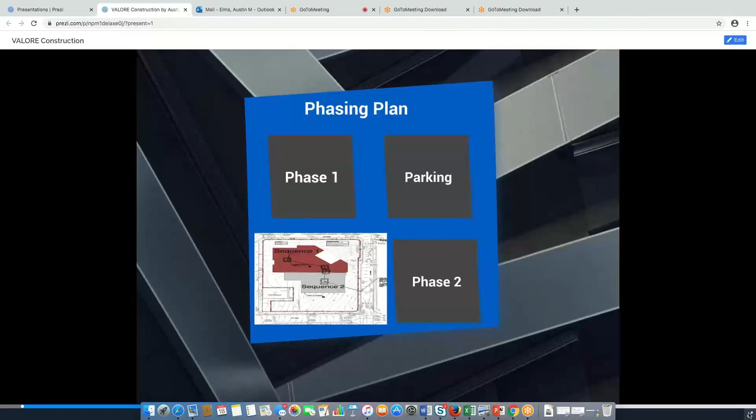So with that, we will move on to the project site logistics plan. We've put a lot of thought into this, with approximately 4 to 5 different entrances transitioning throughout the entire project. We have the construction office space in the lower left-hand corner, a double wide per spec.

We also have break areas under shade where we can have lunch or a safety stand down, whatever we need that space for. The long-term material laydown area on the south side of the site was designed to hold approximately 20-foot length connexes for each of our contractors to use if they need extra material.

Coming in from the right-hand side from construction gate C, we will have dumpster pickups coming over from that road, with the ability to pick up all 5 of those dumpsters for LEED regulations. As you can see, we have multiple long-term laydown areas.

For sequence 1 for building A, we've designed the short-term material laydown area where building B is, which we will use to house all of our steel that we're erecting for building A and any other miscellaneous items we'll be using for building A.

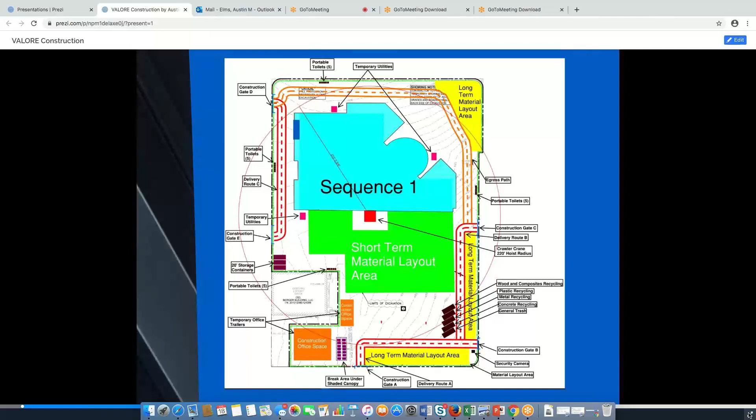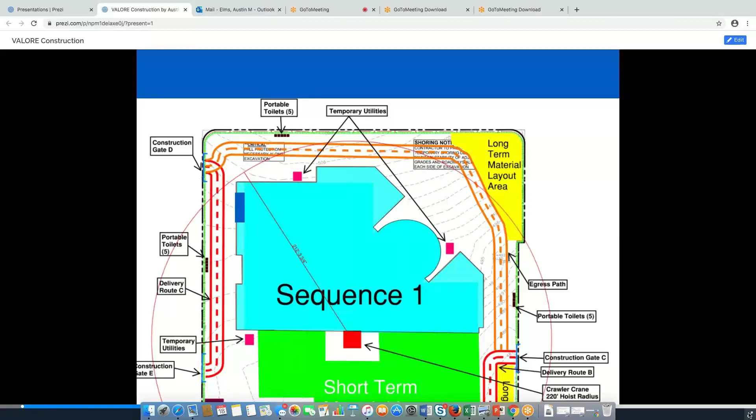Up on this side, you can see the darker blue area where we have our buck hoists. Material will come in from that, and if it comes in from the bottom right-hand side, they can use that egress path we designed at the very top to get material from the bottom to the top.

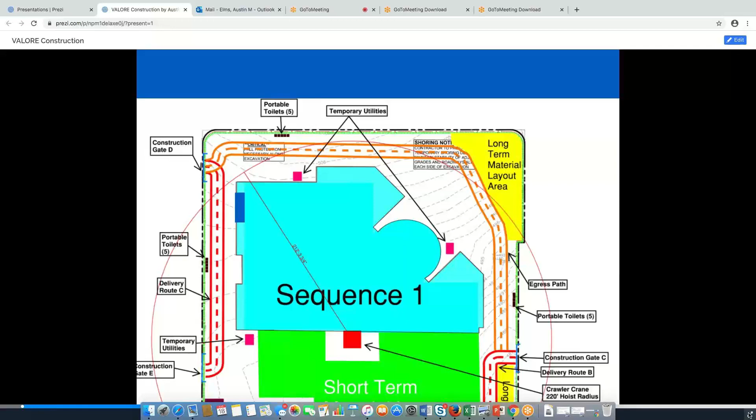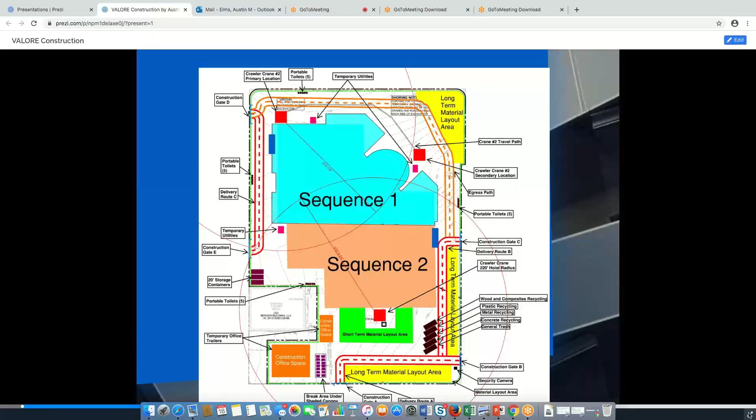Then we will move on to phase 2, where we'll be building Building B. The main difference that changes from this is we significantly shortened the amount of space we have for short-term material laydown areas. But we will heavily utilize the long-term laydown areas at the bottom and all along the sides.

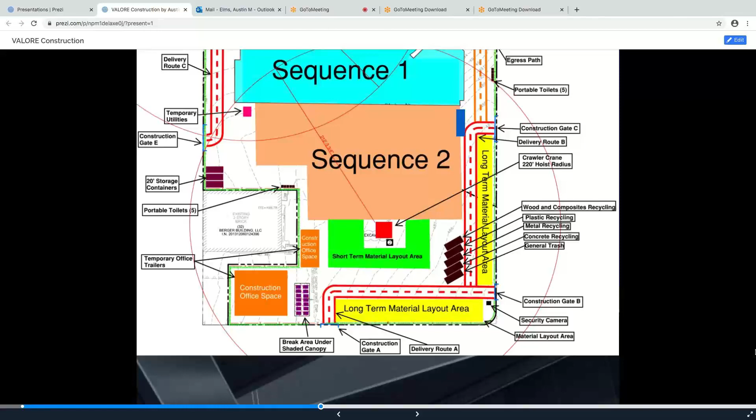One other thing we designed is the temporary office trailers, with one right next to the short-term laydown area acting as our conference room for OAC meetings and other meetings, fully air-conditioned for spec. We will also have that buck hoist right in front of construction gate C for any material needed for Building B.

You can see in the upper left-hand corner our crawler crane number 2. When we first start, with the 220-foot hoist radius, we will not be able to cover 100% of the building, so we'll get as much as we can while we're there. Then we'll use the crane number 2 travel path to move it over next to the rotunda in order to get 100% coverage on sequence 1 and sequence 2.

Moving on to parking: we've talked to the Nashville Public Library directly adjacent to our site, and we've agreed with them on a deal where we can use approximately one entire floor of their 6-level parking lot for our subcontractors and us to use.

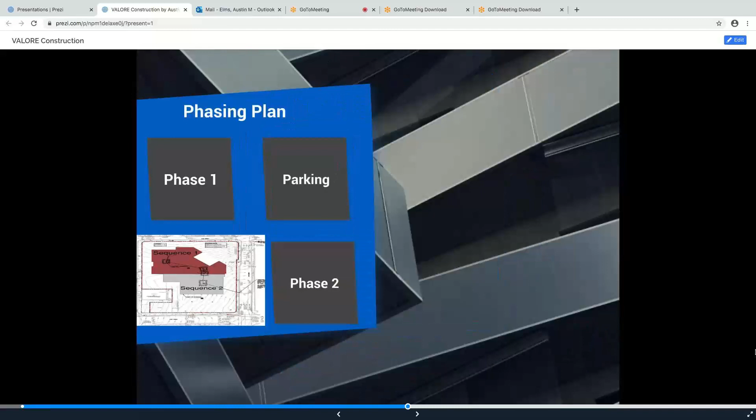We've worked out that if there are any thefts from our site, we will have a 3-strike deal. After 1 strike is just a warning, 2 strikes is a written warning, and after 3 strikes, it will be in their contract that they can no longer park there and will have to find their own public parking.

Hello, my name is Sam Pena, I'm the assistant estimator on the team. For our total project cost for just core and shell, we found a $96.8 million project cost. From there we have our cost of work, including the superstructure, concrete, and foundation.

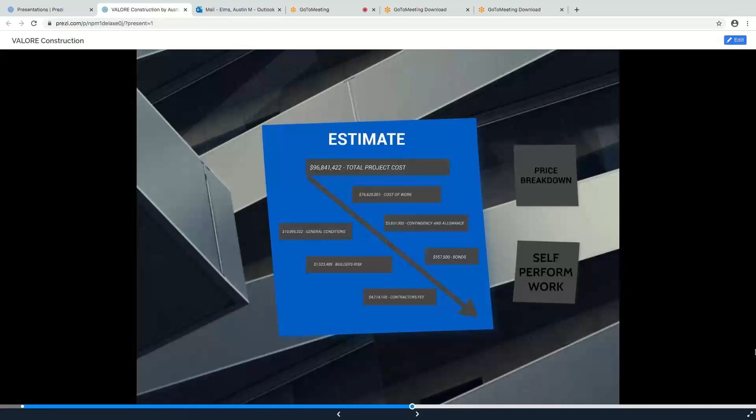Those are most of the big points. From there we have our indirect costs: general conditions at 10 million, contingency and allowances at 3.8 million, and builder's risk at 1.3 million. We also have a very competitive 4% contractor's fee for 4 million.

From here we'll go into a bit more of a price breakdown. Some of the big ticket items are going to be concrete, metals, openings, conveying equipment, and electrical.

In order to save some money on our project, we will be self-performing work such as concrete. This can alleviate issues in productivity across the project, including money, time, quality, and safety. For the money portion, we've calculated to save 3 to 5% by self-performing this concrete portion of the project.

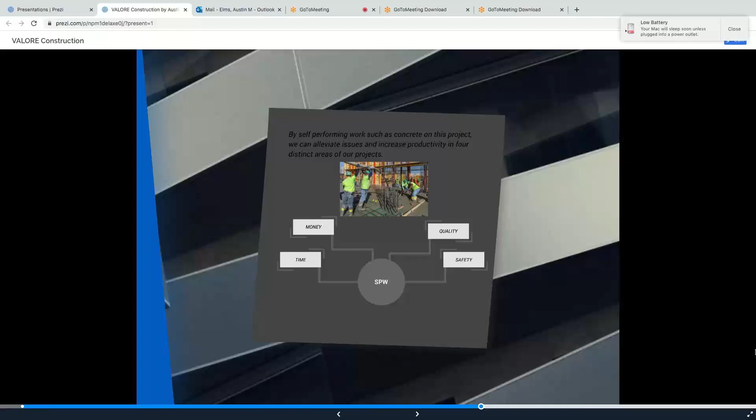All right, and now I'll be moving to my safety manager, Joseph.

Wonder if that low battery got to them. Austin, your audio's gone out.

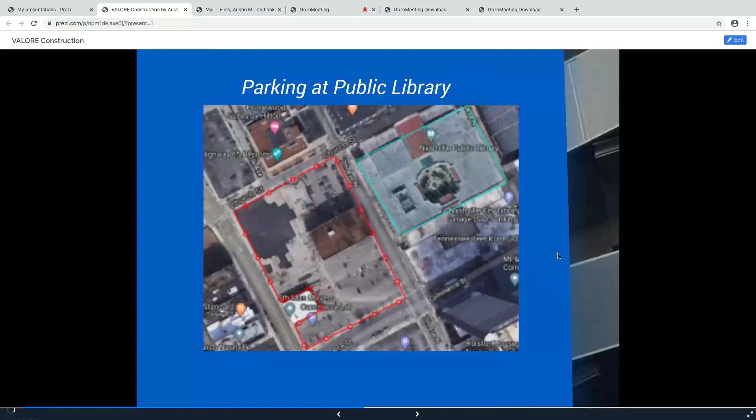Straightforward. I think we ended off with quality control. Sorry about that, we had some technical difficulties, but we just talked about the procurement phase, and then we're going to the purchasing meeting where we meet with all the vendors and have all the documentation of the testing materials to make sure that all the material is up to par.

From there, we go to the pre-mobilization meeting where, before any work starts, we talk about the safety hazards, the work constraints, and permits, anything that we need to get done right before we can break down and get everything started. From there, we go to the preparatory meeting where we have this meeting before each phase to talk about the big things that can lead to safety problems and quality problems.

And we coordinate with the subcontractors to reiterate the owner's project requirements. From there, we go to the initial inspection where we will test all the materials to make sure that everything is being installed properly and up to the owner's project requirements.

Here at Valore, we take safety as our top priority. We want to make sure that everyone gets there in the morning and leaves the same way safely. And we know that safety problems can be a big problem for our project team the same way as it can be a big problem for your project team.

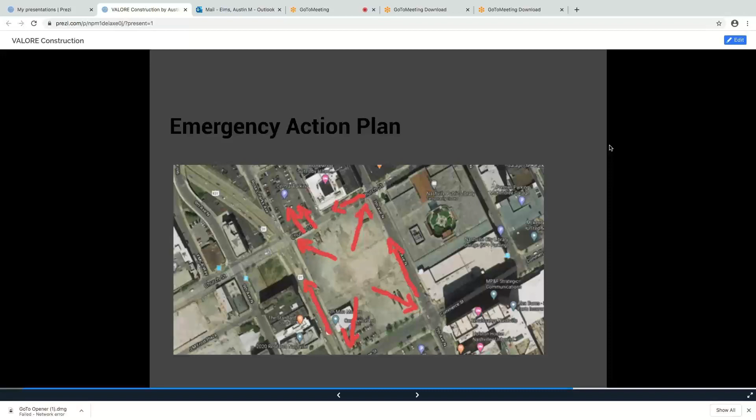These are our top hazards: fall hazards, where struck-by, hot work, crane lifts, and blasting. We understand that this project is very unique when it comes to blasting, where the geotechnical report has even called out and strongly recommended blasting.

We know concrete hot work, where we will have a lot of hot work on this, where all the concrete panels will be welded onto steel members. Struck-by from all the crane operations that will be proceeding.

Then the COVID-19 action plan, we will have PPE option 1, PPE option 2, either one, with option 1 having a disposable and an N95 mask, and PPE option 2 will have a face shield and N95 mask.

We'll have proximity working options, everyone needs to be 6 feet apart unless they need to be working in close vicinity. Then they will need to always have their PPE on.

We'll also have stretch and flex and make sure that everyone is 6 feet apart, and we'll be spreading out across the job site.

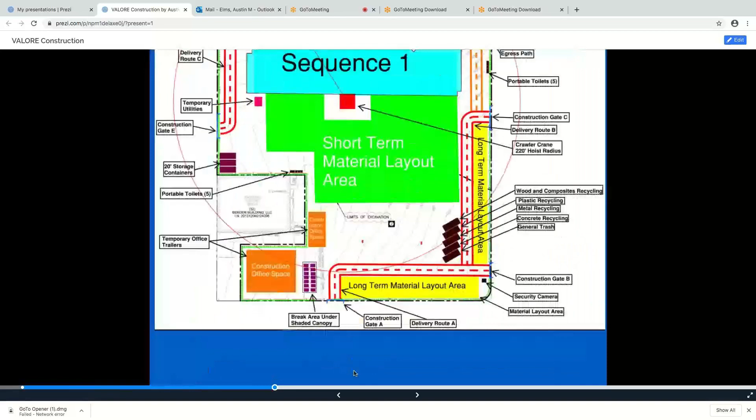Okay, so I got a couple quick questions on your estimate. We talked about a crane, and in your GCs I see that you carried a crane, but I did not see where you carried a crane operator. Can you tell me how you're going to cover those costs? Those costs will be coming out of our contingencies and allowances.

Okay, and then the second part I had on the estimate was you talked about a buck hoist in your site utilization plan, which was good, but I didn't see in your GCs where you carried a buck hoist. How do you plan on covering those costs? That will be covered under the contingency and allowance as well. Okay.

Can I ask one more? So I got one more for you, since you're going to use up your contingency quite well. In your clarifications and assumptions under Division 9 finishes, you stated that the estimate doesn't include interior finish out on levels 2 through 6. That's interior framing, floor finishes, ceiling finishes, wall systems, millwork. Is that in the estimate, or where is that located? So that includes all the exterior shell, the glass facade and exterior glazing. It does not include any of the windows that may or may not be in the interior of floors 2 through 6. Okay.

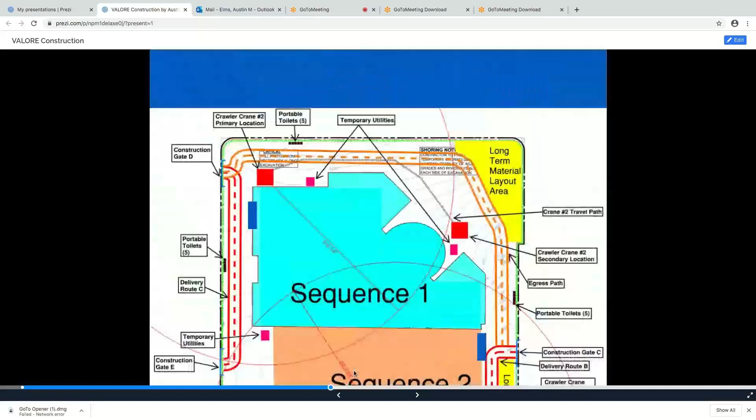So I noticed in your proposal, I was looking at the site logistics plan, and the crane radius is kind of elliptical in shape. Can you pull that up by chance? Your site plan, I think maybe it's distorted in your proposal. So I just wanted to confirm that your crane radius is accurate in how you calculated it. You feel confident with that?

Yes, we do feel confident with that. The reason we decided to go with crawler cranes is because they have such a high lift capacity, and we were thinking about the weight of those precast concrete panels and having to make those long distance pulls, and we didn't feel confident that we'd be able to get those heavy lifts with the tower crane, which is why we decided to go way above and beyond with a 180-ton crawler crane.

So we are very confident that we can hit those 220-foot lifts, especially with, I forgot the exact dimensions of the crane that we picked out, but I think it's 220 at its max length, which even at its max length should be able to hold approximately 20,000 pounds or 10 tons, which obviously we're going to try and stay under the 75% lift capacity so that we don't have any dangerous lifts or high risk lifts.

So yes, we are confident that we can hit the 220-foot lifts, and we will try and minimize those as much as possible. Obviously those will be high risk. But yeah, we will try and we're confident we can minimize those high risk activities as much as possible.

Okay, and then 2 questions related to the offsite parking. Is that cost accounted for in your estimate, and if so, where? It is not counted in the estimate. We have written into all of our trade partners' contracts that we have coordinated with them. If there is an additional cost, like I said, it's written into their contract that they will have to cover it, and that will be agreed upon once we sign the contracts.